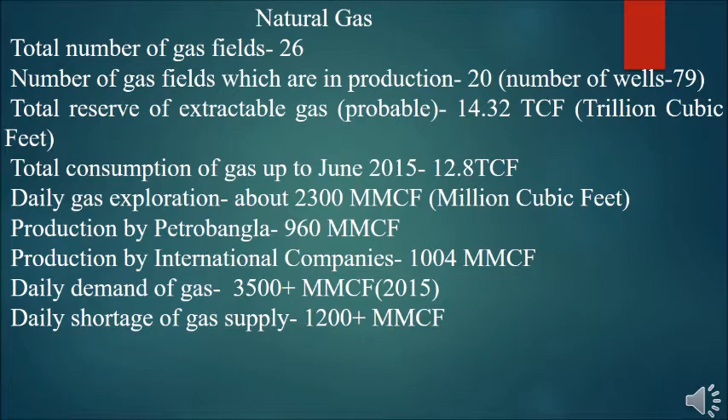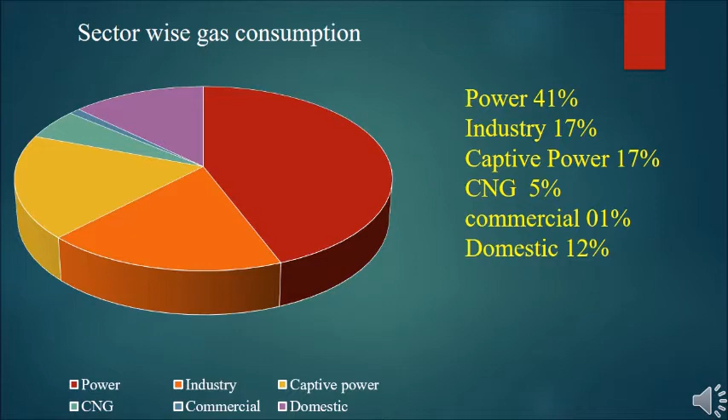From the pie diagram, we can see that the largest amount of natural gas is consumed by the power sector. Then industrial sector is consuming about 17%, captive power 17%, CNG 5%, commercial 1% and domestic 12%.

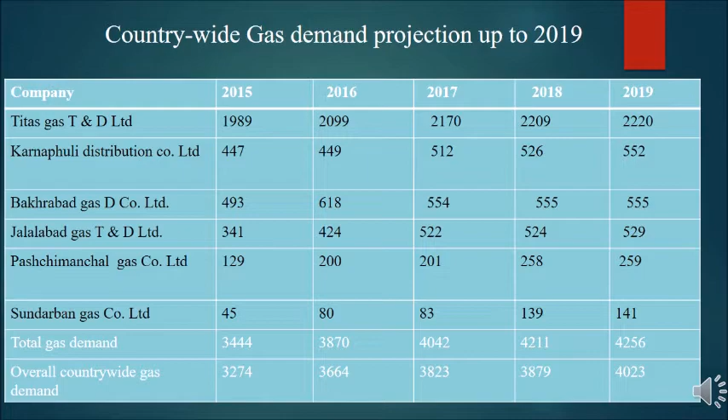From the annual report of Petrobangla, we get the overall scenario of countrywide gas demand projection up to 2019. The gap between demand and supply is widening.

We are using gas as CNG, LPG in fertilizer industry, power plant and many other household and industrial purposes, which is creating pressure on distribution of natural gas. The most frightening thing is that the reserved gas will run out in the next 10 years.

Here we can see current coal reserve and extractable quantity. The measured coal reserve in Barapukuria is about 303 million ton, Phulbari 572, Khalsapir 143, Dighipara 150, and Jamalganj 1053 million ton.

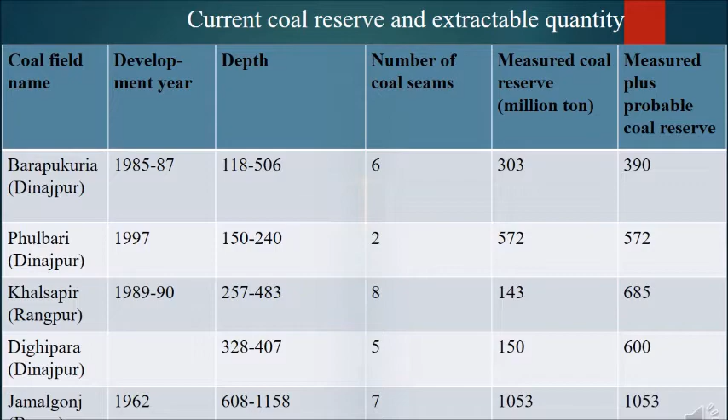So let's find some solutions. Possible solutions for the energy crisis can be coal, nuclear energy, hydropower, solar energy, biogas and other renewable energy.

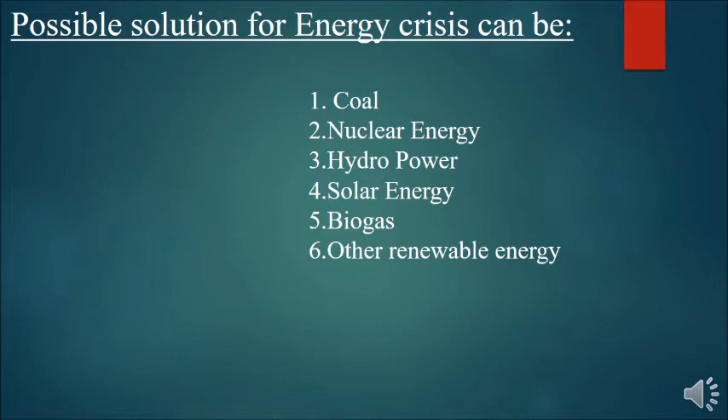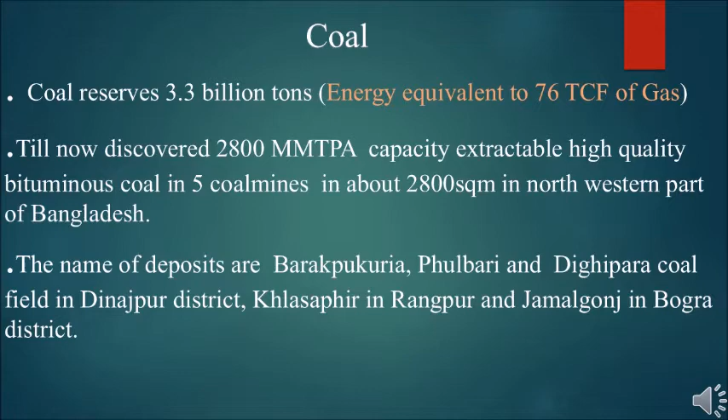Coal can be the best alternative solution for the energy crisis, as the reserve of coal is about 3.3 billion ton, which is equivalent to 76 trillion cubic feet of gas.

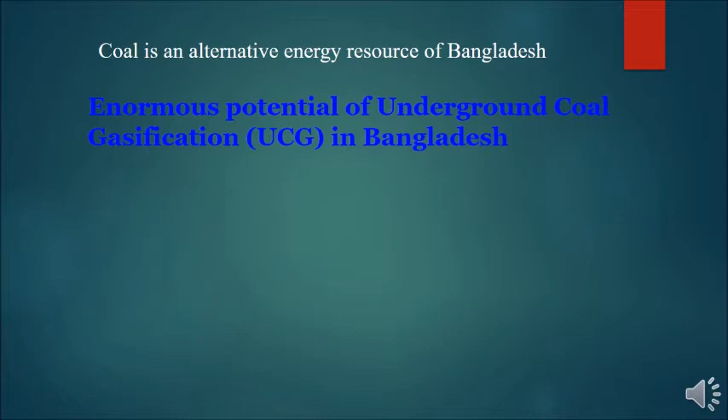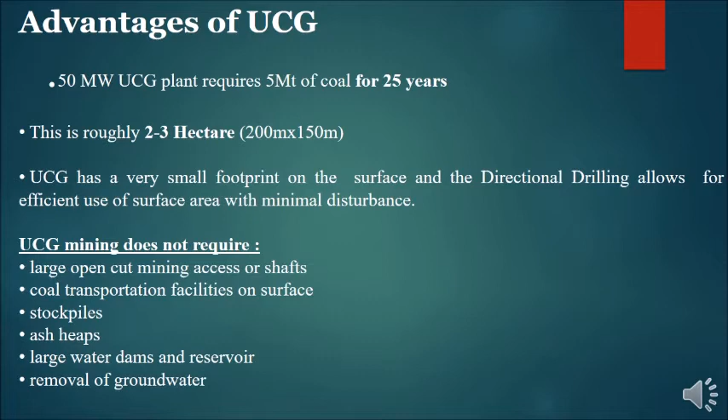In general, UCG can operate at up to about 80% efficiency, that is, the amount of syngas energy recovered at the surface is about 80% of the original heating value of the coal feedstock.

Underground coal gasification is used in many European countries, which is very much acceptable environmentally.

Domestic need of energy can be replaced by biogas. Biogas typically refers to a mixture of different gases produced by the breakdown of organic matter in the absence of oxygen.

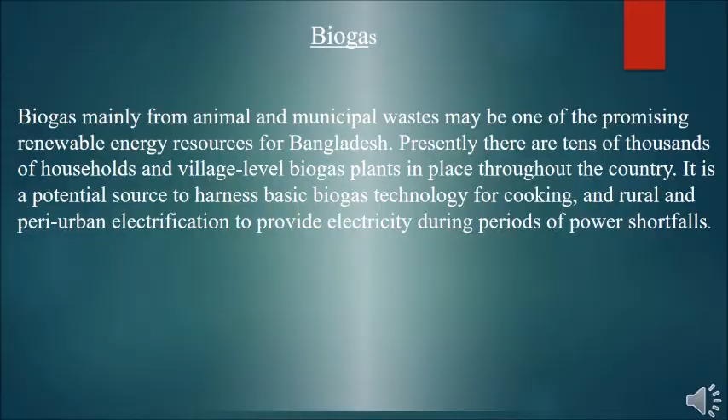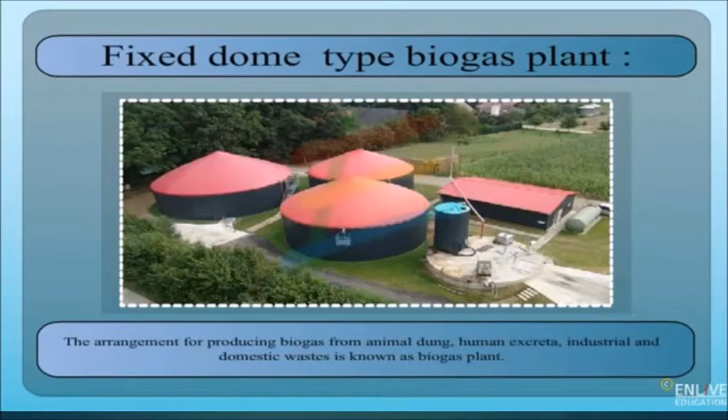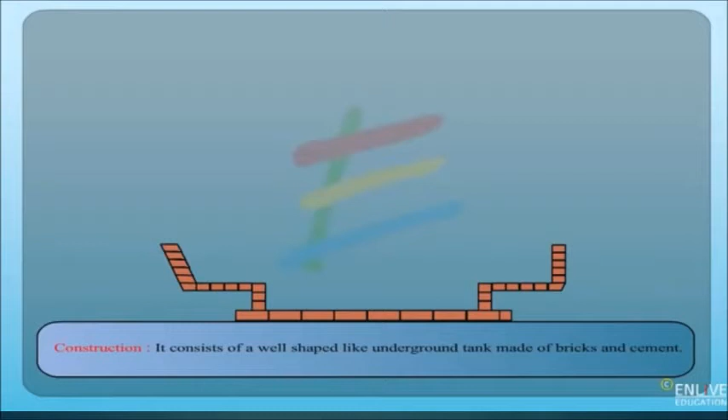Fixed dome type biogas plant. The arrangement for producing biogas from animal dung, human excreta, industrial and domestic waste is known as a biogas plant. Construction: it consists of a well-shaped underground tank made of bricks and cement, called the digester tank, which has inlet and outlet valves. The roof of the tank is dome-shaped, and a gas outlet pipe of the dome is fitted at the top.

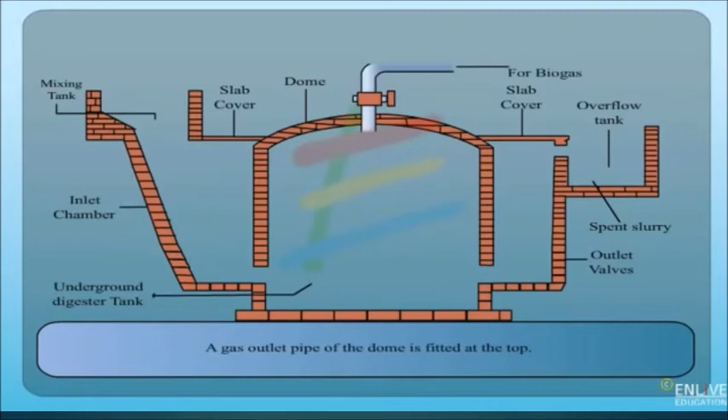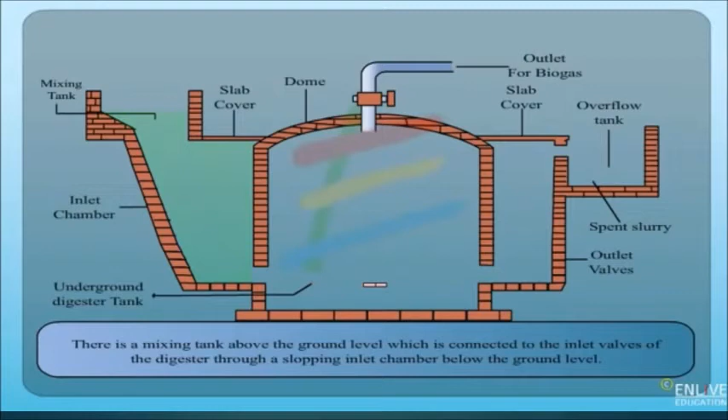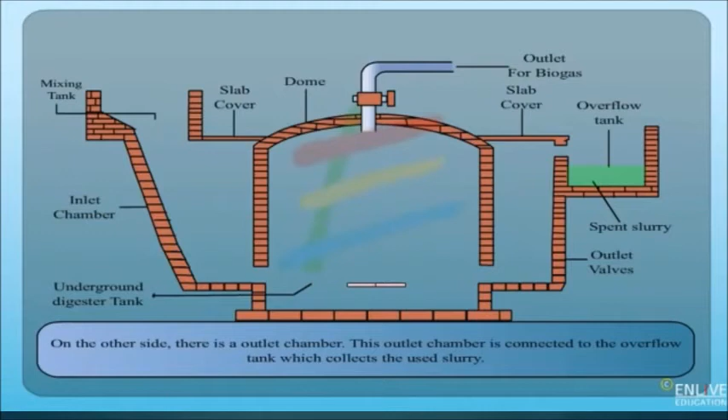There is a mixing tank above the ground level which is connected to the inlet valves of the digester through a sloping inlet chamber below the ground level. On the other side, there is an outlet chamber, which is connected to the overflow tank that collects the used slurry.

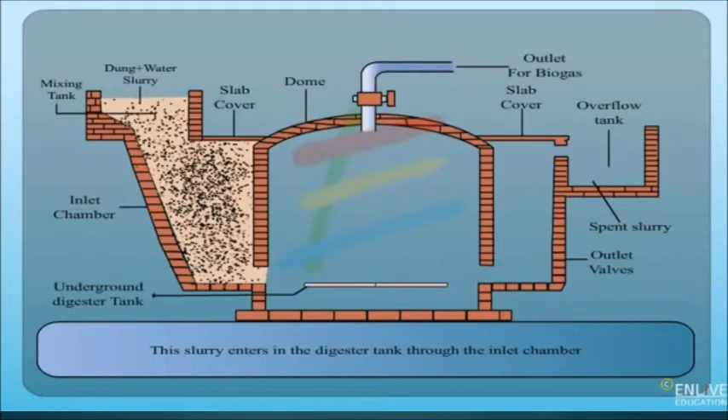Working: animal dung is mixed with water to make slurry in the mixing tank. This slurry enters the digester tank through the inlet chamber, and is left for about 2 months for fermentation.

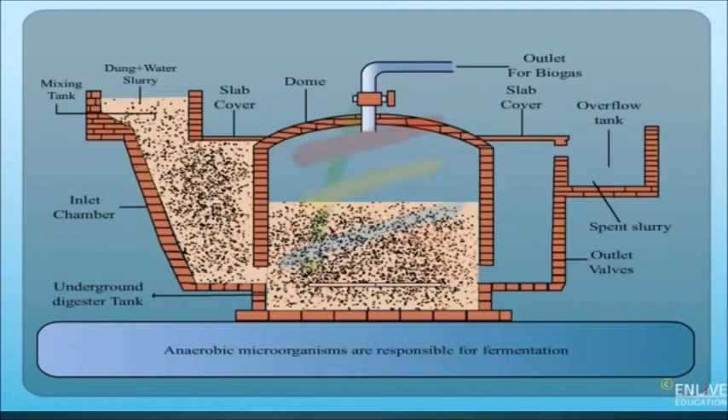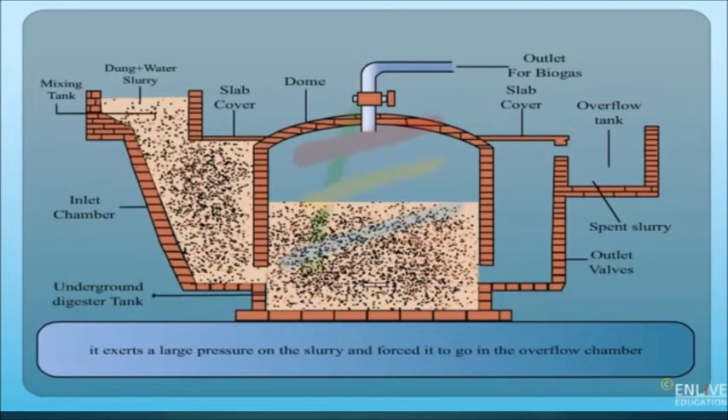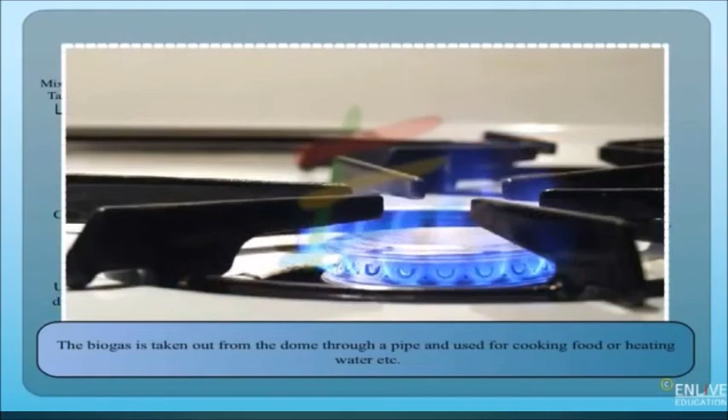Anaerobic microorganisms are responsible for fermentation, which produces biogas that is collected in the dome. It exerts a large pressure on the slurry and forces it to go into the overflow chamber. The biogas is taken out from the dome through a pipe and used for cooking food or heating water, etc. The residue of the plant is used as manure because it is rich in nitrogen and phosphorus.

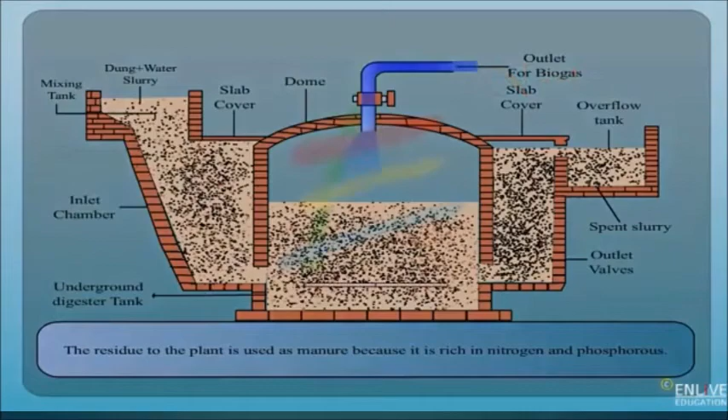We can meet the challenge of energy crisis using different alternative energy sources like hydropower, nuclear energy, and solar energy.